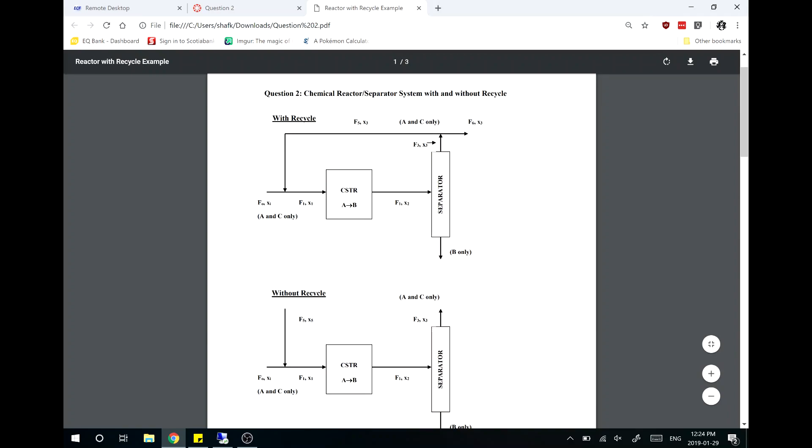Assumption 4: no transportation delay between separator and feed recycle mixing point. How about someone from the table over there, you guys? Yeah, someone from that table. I should have numbers, like table number 3. Yeah, you guys over there. Hello? Yeah, you guys, you're going to answer this question for me. How do we make use of the assumption that there's no transportation delay between separator and feed recycle mixing point? How about you guys help them out? Right here, yeah. No transportation delay between separator and feed recycle mixing point. Anybody there?

Well, I think that X3 would be the same, so you can use that especially in the mixing point calculation, or in Formula 1. Yep, so there wouldn't be any time delay. Right. And you can assume that they'll be the same. That's right, exactly. So the fact that we use X3A as the mole fraction leaving the top of the separator, and you notice in the mixing equations we use the exact same X3A as the mole fraction going into the mixing point—from a steady state point of view, that looks totally reasonable.

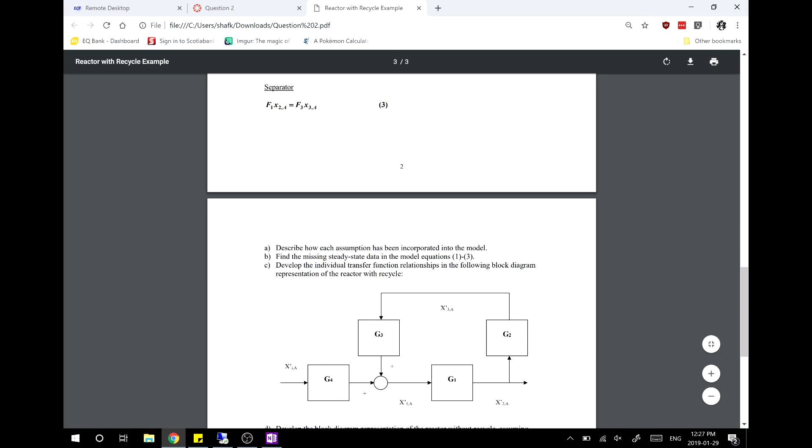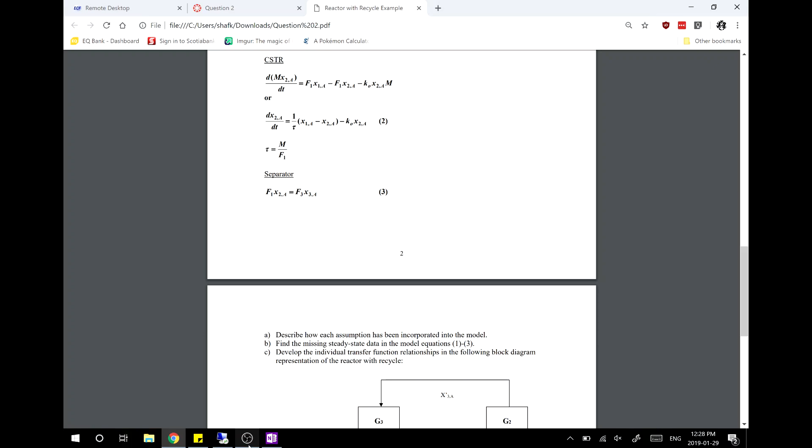Okay, so the next part is a little bit of pencil and paper work. What I want you to do is question B: find the missing steady state data in the model equations. I give you some of the steady state data but not all of it. The main things we're after are X1A, X2A, and X3A at steady state. You're only given XiA at steady state, what's going into the entire system at steady state, 0.95. But I'd like you to solve for the other 3 mole fractions, X1A, X2A, X3A. I'll come back and ask that table for some information, and you guys at the back corner give me a piece, and you guys right in front give me a piece too. So we're saying find the missing steady state data in the model equations.

Alright, I'm gonna mute the video for a second because I don't want people to hear the dumb shit I'm gonna say.

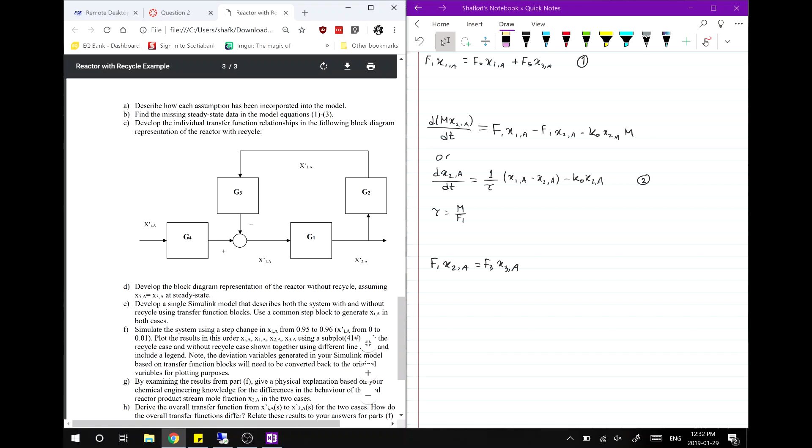Still setting up the equations, okay? You guys over there have a number for me? You got one for me? At the back wall, still working? Here, still working? Okay, give you a few more minutes.

So you should be working with all algebraic equations. The only time derivative is the CSTR, so you set that to 0, and then all other variables get set to their steady state values. Oh, that's right, so you have 1, 2, 3, 4 equations. The CSTR is not changing with time, so that is 1 true equation, and four unknowns: flow rate and 3 mole fractions.

Okay, you can attempt this, does someone have their hand up? Do you have one for me? But I'll still wait for him to do it anyway, just to confirm the answer. I'm not confident. Why aren't you doing this? Why aren't you doing this? Doing what? No, like writing it out. Oh, because it's simple. Yep.

Yeah, I'm trying to do question 2C, sorry. I'm not exactly the best with transfer functions. Yeah, neither am I. So at this point I don't even know how to do this stuff. Probably gonna wait for him to do it.

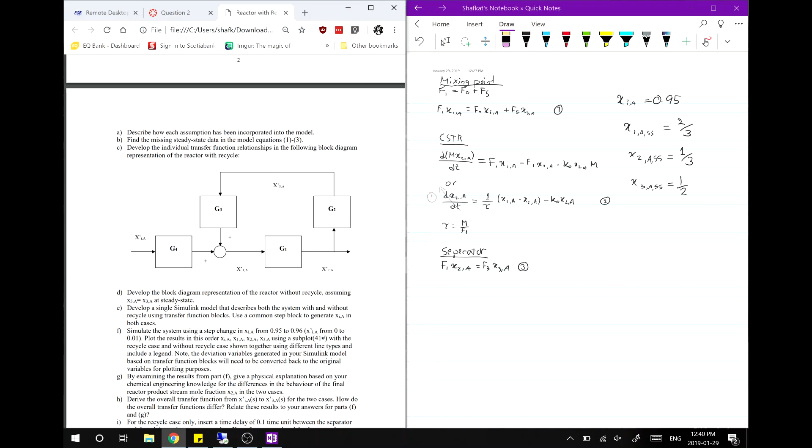Okay, so it's just output over input is all it is. So every transfer function is always output over input, right? Yeah. And if we start with G1, like he said, the output is X2A, while the input is X1A. Isn't that right?

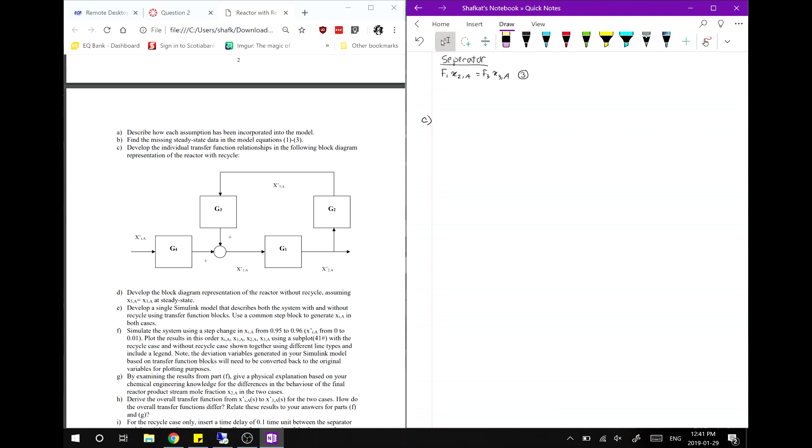And then do we write X2A out, like in the equations that are given? So the output is gonna be x prime 1 of A, and the input is x I of A and x3 of A. It's not X prime 1 of A? No, this is to get this, you're inputting this and this together. Yeah, I get that, but I thought we were starting with this one. Oh, if you start at that one, then it's x2 prime.

Yeah, that's what I was talking about. Okay, let's start with G1. I feel like that just makes sense. Okay, because he also said it in that order. Okay.

So the transfer function is output over input, and that equals x prime of 2a over x prime of 1a, right?

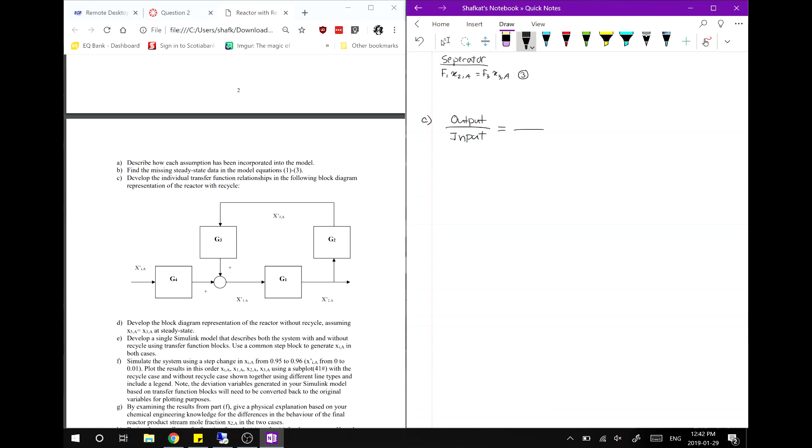Well, you gotta write down the equation. We have to write these out in the form of the CSTR equations given? Yeah, so you usually get y prime over u prime of s. But then I don't know what equations to use for those. Oh, we would need the Marlin textbook, right? For the Laplace transforms? Yeah.

Oh, right, then it's y prime of s over u prime of s. Or I think it's the other way. You could open up the Marlin textbook, like I can on my computer, but I don't know what to look for and where. I need to recruit someone who's smarter at this stuff to help me record the videos. Oh, sorry, Shafkat. No, that's not how I meant it. Yeah, it is y prime of s.

Okay, but then I guess what we can do for the next part is, since we're still working at steady state right now, yeah. Then I guess you take the equations where you isolate for the two variables and put them on top of each other. So how do we change it to the S domain?

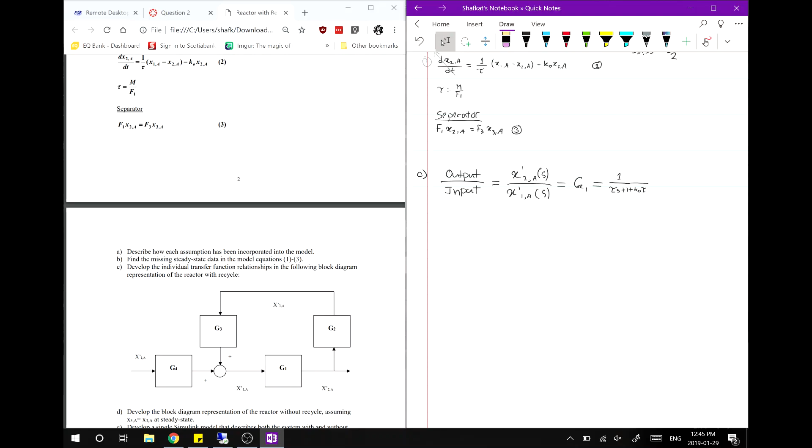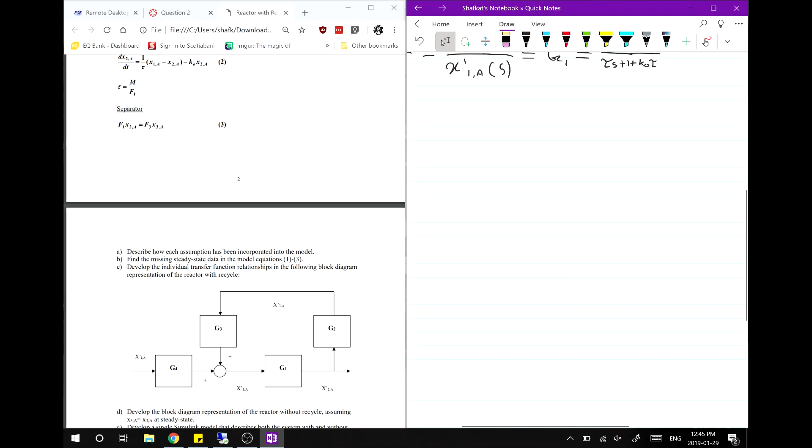1 plus K naught tau, right? So the numerator will become 1 over 1 plus K naught tau, over tau over 1 plus K naught tau S plus 1. Okay?

So the gain of this transfer function is 1 over 1 plus K naught tau. The time constant associated with this system is tau over 1 plus K naught tau. So notice that the time constant is not equal to the residence time, okay? Because the speed of the system, the response time of the system, is also related to the rate constant because we're tracking component A here. So the rate constant figures into the dynamics as well, which, in a way, you should expect.

Okay, now G2, you're dealing with just an algebraic expression here, so there's no derivative to get you into trouble. I'll just quickly do this one with you. Some of you may have already derived this, so we still write the equation at steady state. The methodology is the same. So the steady state equation is F1 x2a steady state equals F3 x3a steady state.

And then, as with the G1 case, you do a subtraction between the dynamic version and the steady state version. So it's really important you understand that first equation is a dynamic equation. I know there's no time derivative there, but remember I said we assume the dynamics were infinitely fast. It is still a dynamic equation. In other words, x2a is a function of time, x3a is a function of time. So it is algebraic, but that doesn't mean it's the steady state equation.

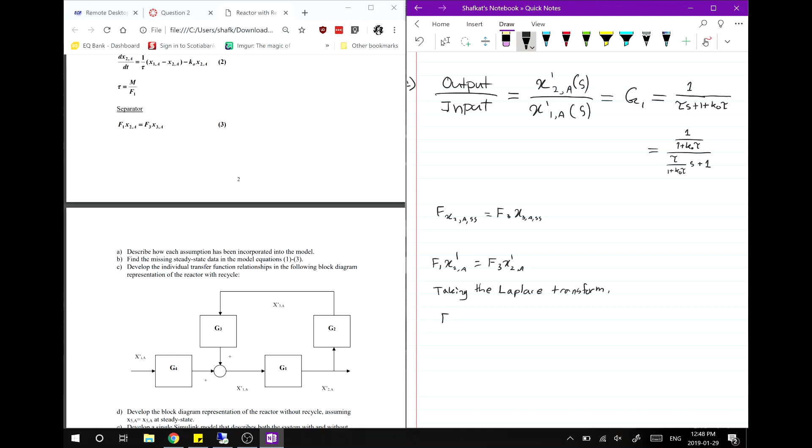And the transfer function that we're after here, the output, is x3a prime of s over x2a prime of s, is equal to F1 over F3. So what kind of transfer function is that? Think of our library of dynamic behaviors.

First order? No. Second order? No. Gain only. It's only a gain. And this is how this very simplified model of the separator behaves.

If x2a changes, say by a step, then x3a also changes right away by a step, scaled by f1 over f3. So real separators obviously don't behave like that, but it...

keeps things a little simple for today's tutorial. So based on that, go ahead and just get G3 and G4. The difference here with G3 and G4 is that you have really, looking at the subsystem, you kind of have two inputs, one output. So what you're looking for is an equation like this: X1a prime of S is equal to some transfer function G3 times x3a prime of S plus G4 times xia prime of S.

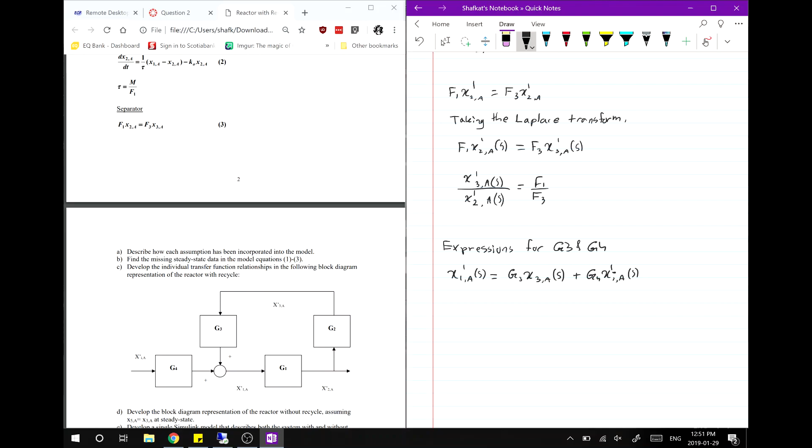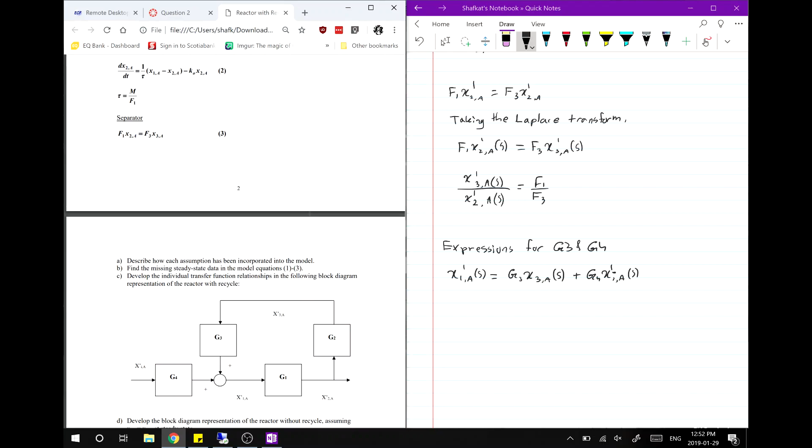So, okay, we can write x3 prime of A, and xi prime of A out, right? You're adding... this is what you said in the beginning, yeah. This is exactly what you said in the beginning. If we were to start with the mixing over here. Yeah, you just add them together. So it's G3 x3 of A plus G4 xi of A. That is equal to x1.

S. So then if you were to, I guess you would want to, that's hard. G4 and G3, so they're different. And you probably can't just take out, you can't take out G4 and G3 by themselves. So, we want to find G3 and G4, so then we would have to find them independently first, right? Like, we have to find one of them on its own, then use it to find the second one.

Awesome. So would we be able to find, let's say, wait, can we not solve for G2 first? And then using G2, we can solve for G3?

Yeah, we could. The approach for the mixing point—just because I want to move along, it's really important you guys make sure you know how to do this. But I want to get to the simulation work, so this is sort of the preliminaries. So again, we're dealing with the mixing point as an algebraic equation. There's no derivative there.

Okay, we really are going to proceed very much like the way we did with the separator. We just write the steady state form of the equation: F1 x1a steady state equals F0 xia steady state plus F5 x3a steady state.

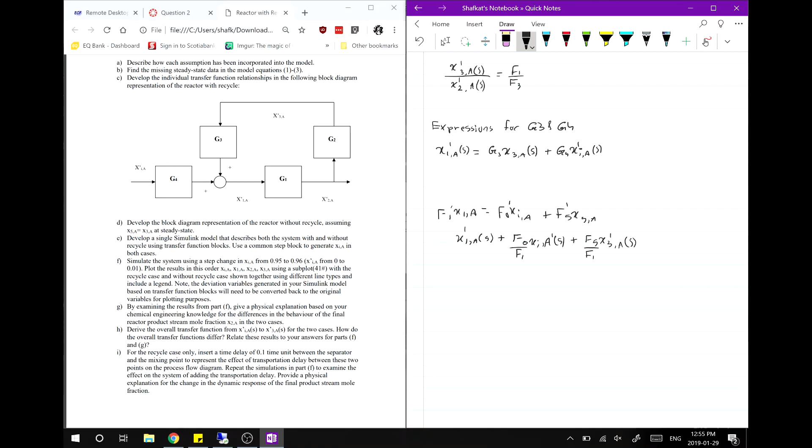Okay, so open Simulink, open up a blank model. If you have any questions, I'll just move through at a steady pace. Put your hand up and Mitchell will get around to you. Open up the library.

Start with the continuous library. Let's put a transfer function block onto our page.

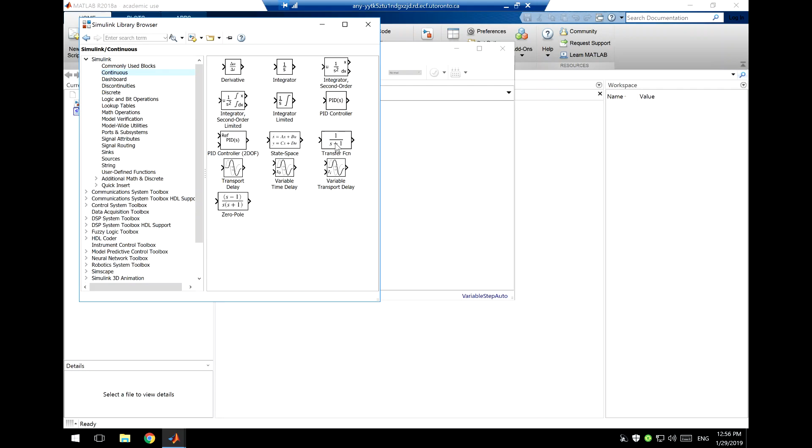What we'll do is build the block diagram first, then go back and fill in the parameters or constants associated with each, then do the numerical methods, and then do the simulations.

So this is obviously what we're going to use for G1. The other three transfer functions are gain only. Now I know we said in class that a gain only is like a special case of first order where you let tau, the time constant, go to 0. So in theory, we could simulate using a transfer function block with a 0 time constant, but numerically or computationally that's not a good thing to do. You can get errors.

So what we're going to do instead is use what's called a gain block. If you go to commonly used blocks, you'll find this triangle called gain. So we want one of those.

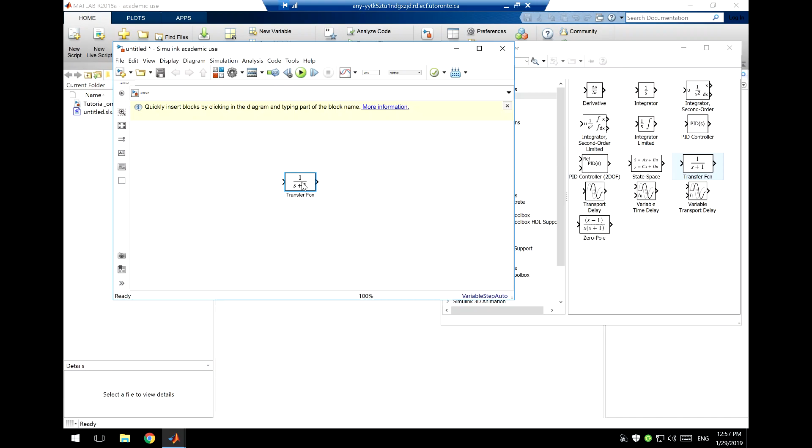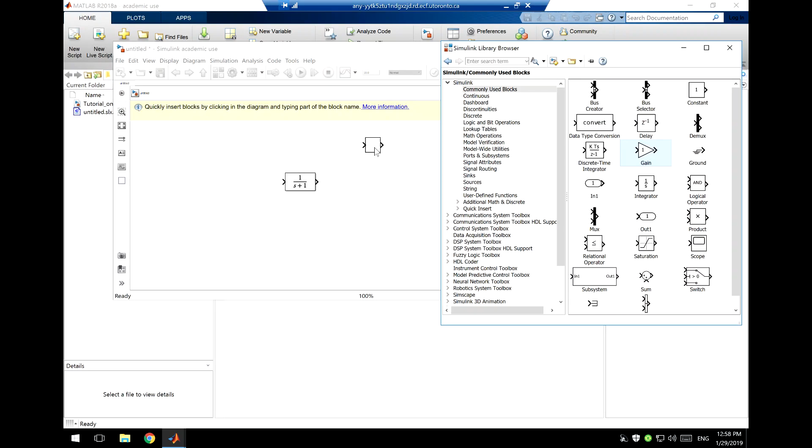And you might want to build the block diagram so it kind of looks like, for instance, the standard way the block is shown is inputs come in on the left and go out on the right. But in this case, we might like to orient this kind of like the process flow diagram. So you can right click, rotate and flip, and I'm going to rotate it counterclockwise once.

So that'll be our separator. Then we want 2 more of these. And you may want to, again, this one I want to rotate back clockwise. And this one I want to maybe flip it.

And we need one summing junction, so in the same commonly used block library, we can grab a summing block, bring that onto the page. And then we can start making the connections.

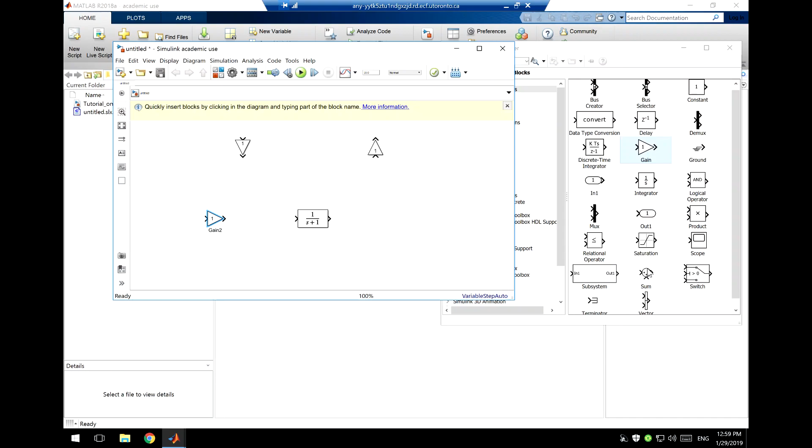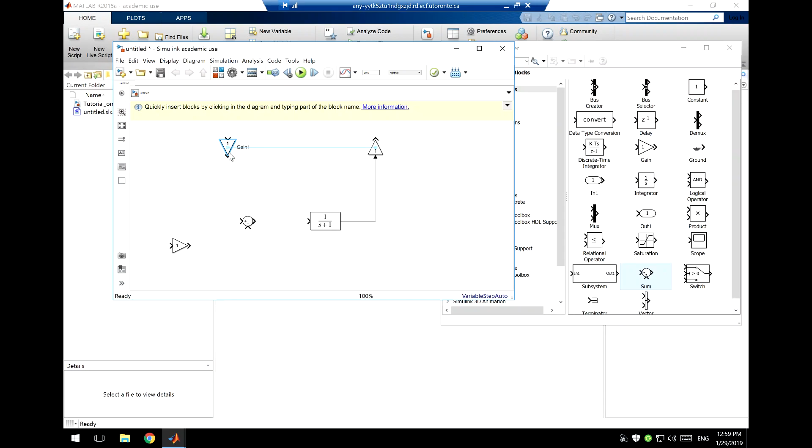So G1, the output of G1 is the input of G2. The output of G2 is the input to G3. And then these come together for the mixing point here. Okay, so something like this.

Now the only true input variable, when you look at the entire system, the only true independent variable is XIA. X1A, X2A, and X3A really are all dependent variables. When you step back and look at the entire system, I know when we were looking at subsystems we were thinking of X2A as kind of an input to the separator, X3A as the output of the separator. When we looked at the mixing point, we said X3 was like an input to the mixer. But when you step back and look at the problem as a whole, the only independent variable is XIA, and everything else flows from that, or is governed by that and the equations.

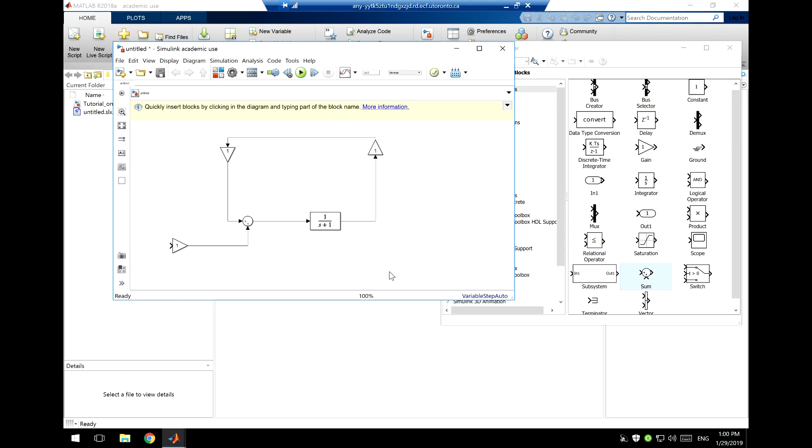So we only need one source block, which will drive the simulation. So go to your source library, and let's put a step block there. And connect those up.

So now let's go in and put in the parameters of the 4 transfer functions. So I just need your help because we need the numbers here.

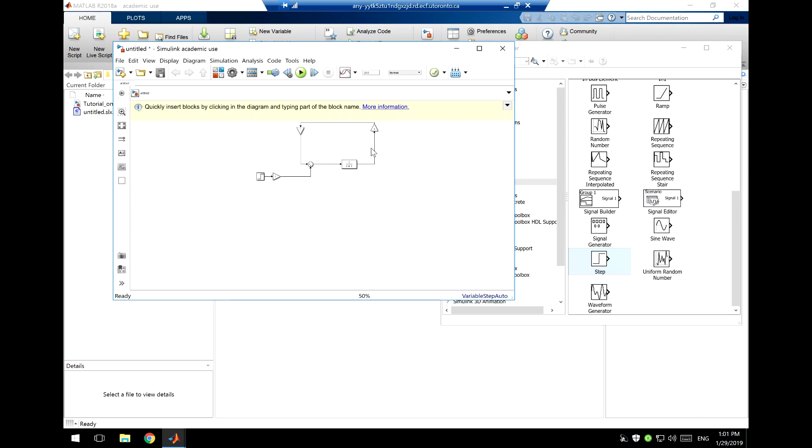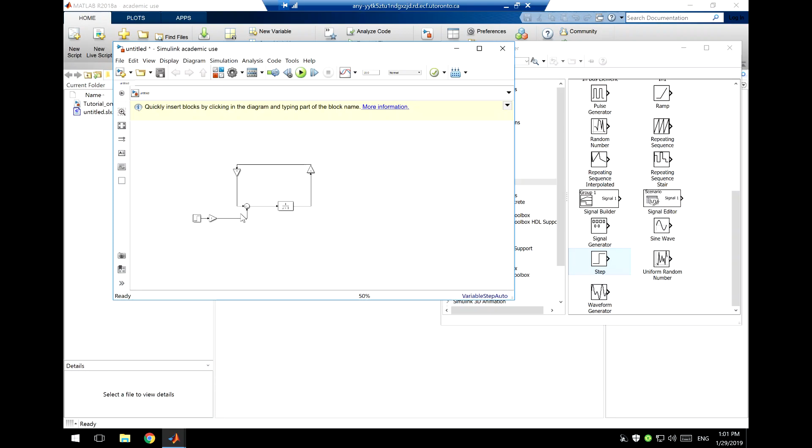So what we need is an expression for 1 over 1 plus k naught tau. We need numbers here. So that's 1 over 1 plus 1. Right? Is it 1/2? 1/2, everybody okay with that? So I'm going to just put in 1/2, and sometimes it's helpful to put it in this way. Then actually when you come back and look at it, we could put 0.5, but the fact that it's 1 over 2 may remind you that it was 1 over 1 plus k naught tau that determined that.

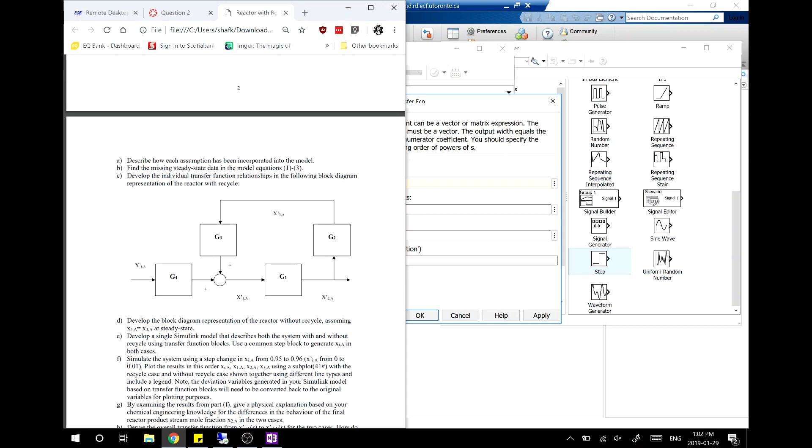Your denominator, so we now need tau over 1 plus k naught tau. So tau is, what is that value? Someone want to help me? 5/27. What is it? 5 over 27? Or 0.5 over 2.7? Or 1 over 5.4? Right? Those are all the same number. Is that correct? Am I doing it right? So 1 over 5.4 is what I'm going to put in. But if you're wondering where that comes from, this is tau over 1 plus k naught tau, and I'm just plugging in the values for k naught and tau that we've been given. Okay, that's okay.

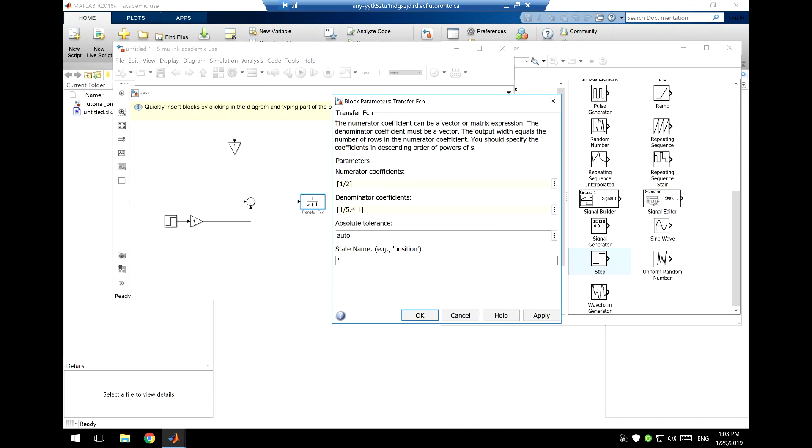Now, we can always make the block a little bigger if you want, so that it shows the parameters. So let's do G2 next. So what did we say G2 was?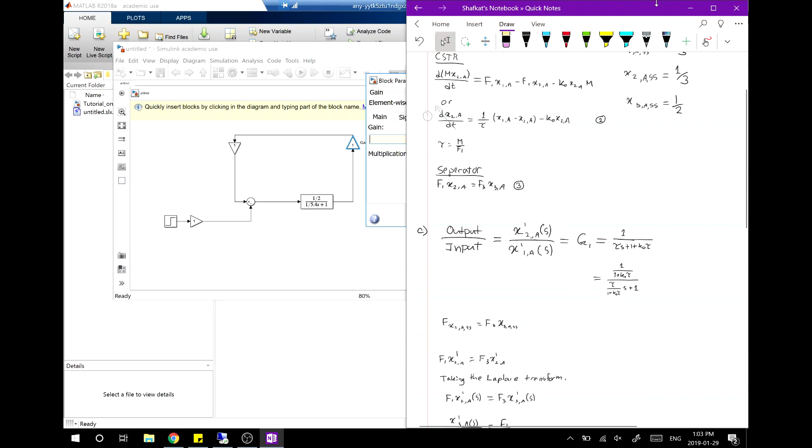F1 over F3. So F1 is 2.7, over 1.8, is that right? 2.7 over 1.8, so again, I would probably put it in like that. You could do the division, but then you'd forget where the heck this number came from. It's more likely you're going to remember it if you see 2.7 over 1.8. Let MATLAB do the division for you.

Next, G3. Again, I can make this a little bigger so it shows me. So now G3 was F5 over F1, is that right? So that's 1.7 over 2.7. Is that right? 1.7 over 2.7, thank you. So 1.7 divided by 2.7.

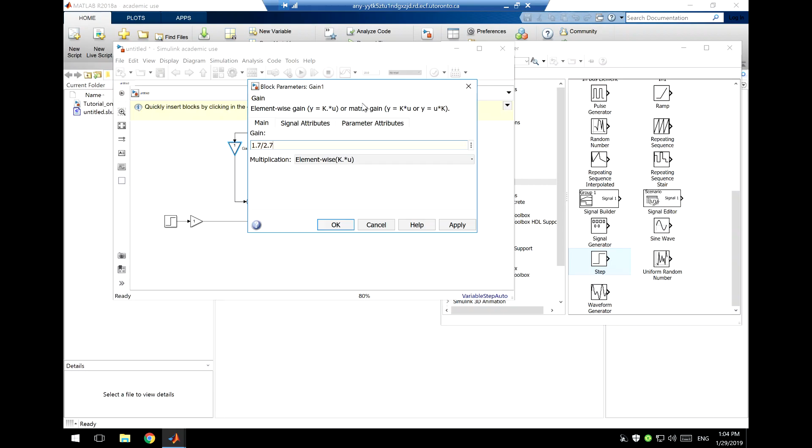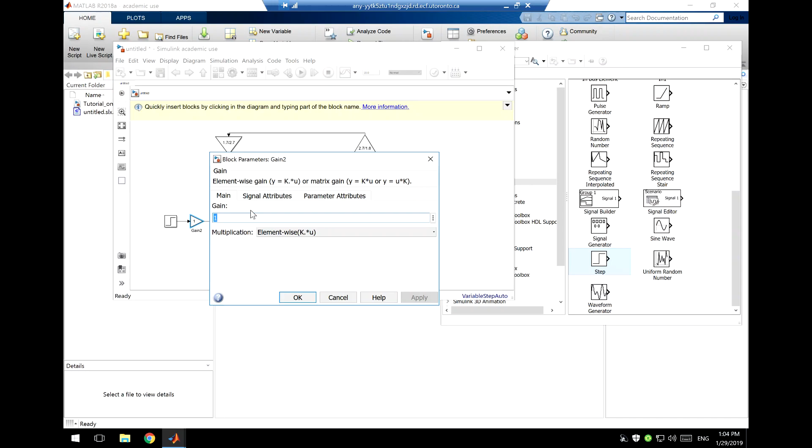And last but not least, G4, which is F naught over F1. So that's 1 over 2.7.

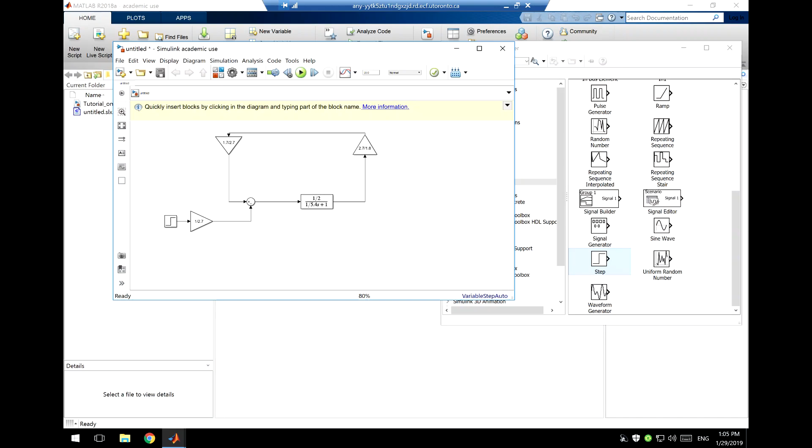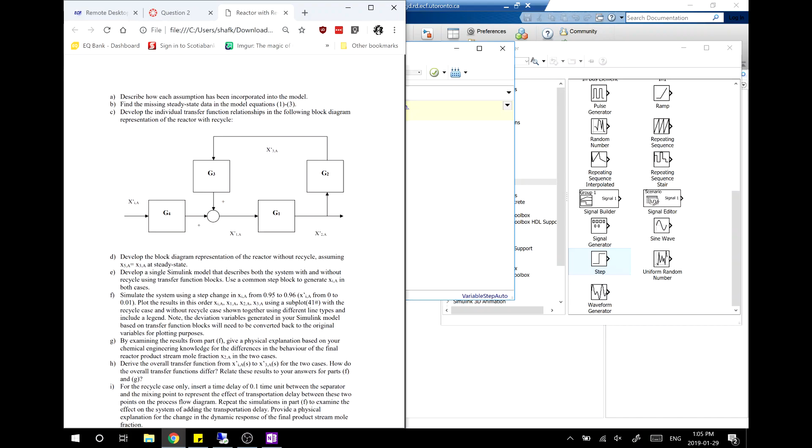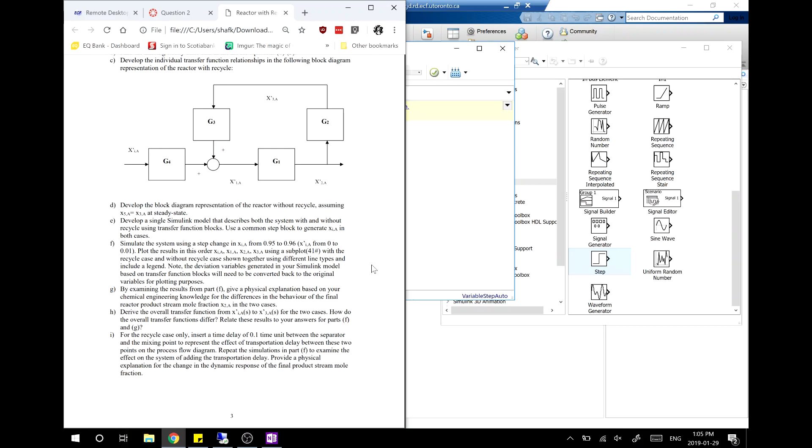Okay, so all transfer functions are in. Now, if you read down the assignment a little bit, you'll see that we're eventually going to want to do a dynamic simulation introducing a step change in X1A from 0.95 to 0.96. Now remember, whenever you're dealing with transfer functions, we're always in terms of deviation variables. So in this simulation, because we've used transfer function representation, we have to put the change in X1A in its deviation form. So in deviation form, the initial value is 0 and the final value is 0.01. That corresponds to a change in X1A from 0.95 to 0.96 after you subtract the 0.95 steady state. We can leave the step time as 1. That's a somewhat arbitrary thing, but the simulation here is.

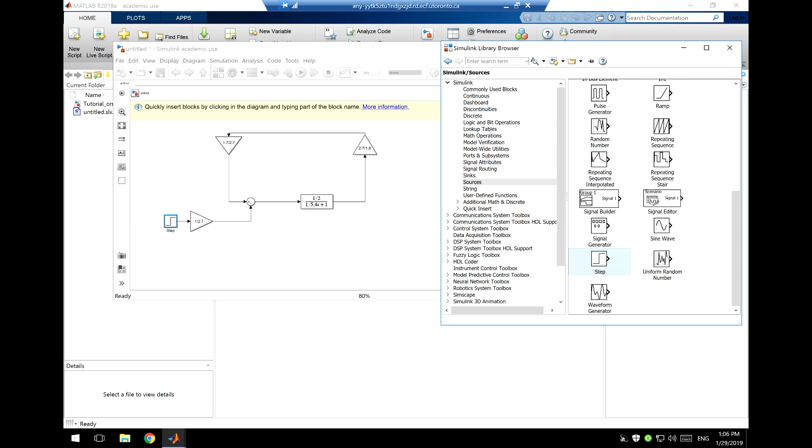So that's in. Let's go, we want to eventually plot all 4 mole fractions that would be possibly measurable. So if you go to your sinks library, we're going to use workspaces.

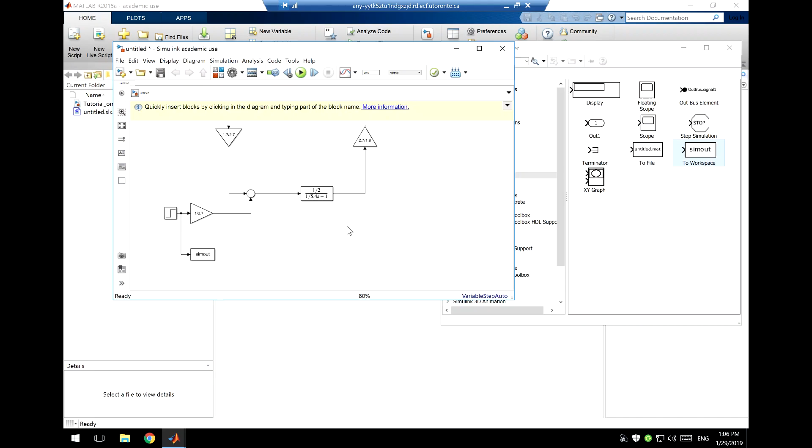So we're going to capture XAI. We also want to capture X1A. We want to capture X2A. And we want to capture X3. Okay, so again, I encourage you to change the names so they're sort of meaningful.

So I'm going to call this capital XAI. It's a deviation variable, so if you want, you can call it prime. And remember to change the save format on these to arrays.

Now, before we go any further, the assignment actually asks you to plot not the deviation variables, but the original variables. So what I've got here going into the first workspace is actually the deviation variable, not the original variable. So what do I have to do to the deviation variable to turn it back into its original variable form? So if I have the deviation variable, what do I do? I add the steady state value.

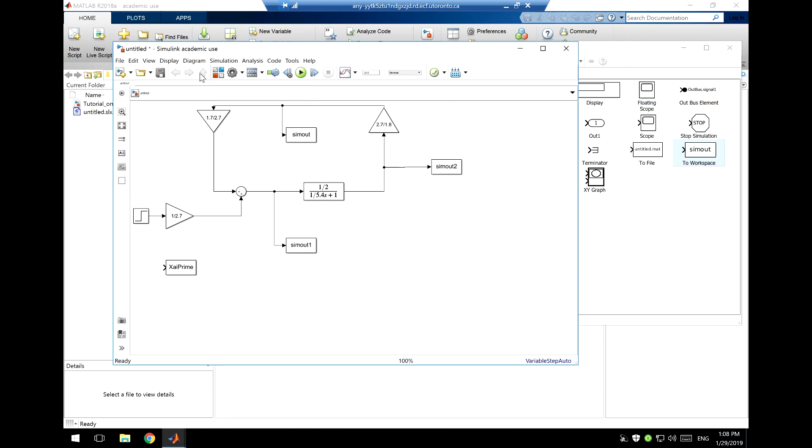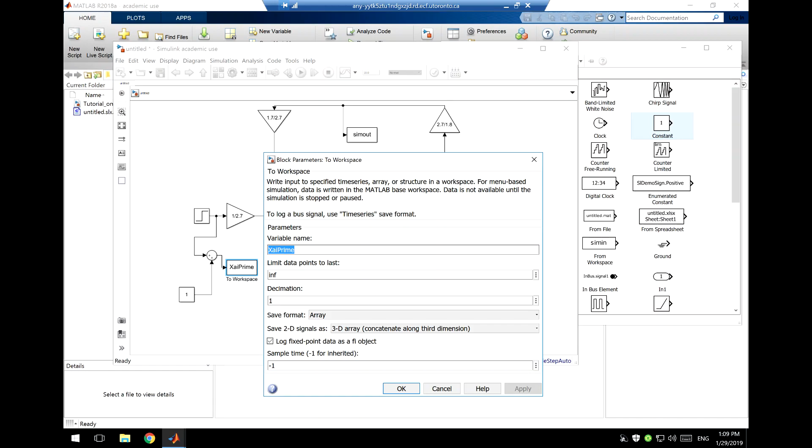So I'm going to correct my mistake here, and I'm going to put a summing junction here. And from the source library, I'm going to get a constant block. So we're going to combine the constant and the deviation to produce the original variable XAI. So I can actually rename this XAI now because that's what I'm going to save as the original variable XAI. So this is XAI prime, and I want to add to that XAI steady state. And the steady state value is 0.95.

Okay, so configure all the workspaces in the same way. It's a constant. This is one of the reasons, for instance, that we started out by calculating the steady state value for X1A, X2A, X3A, because we're going to use them right now.

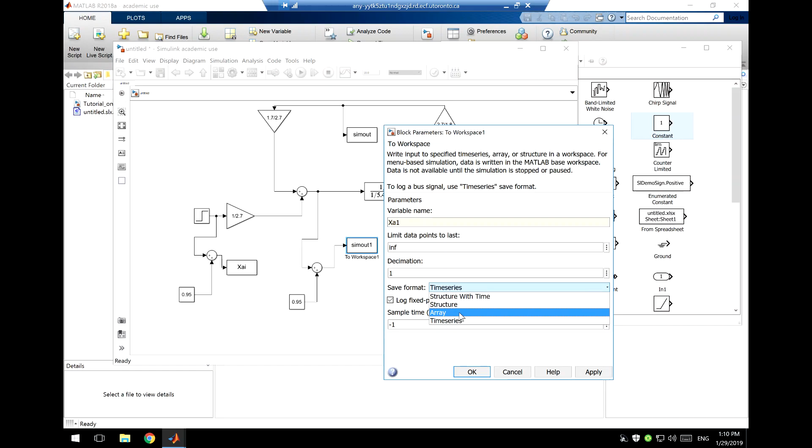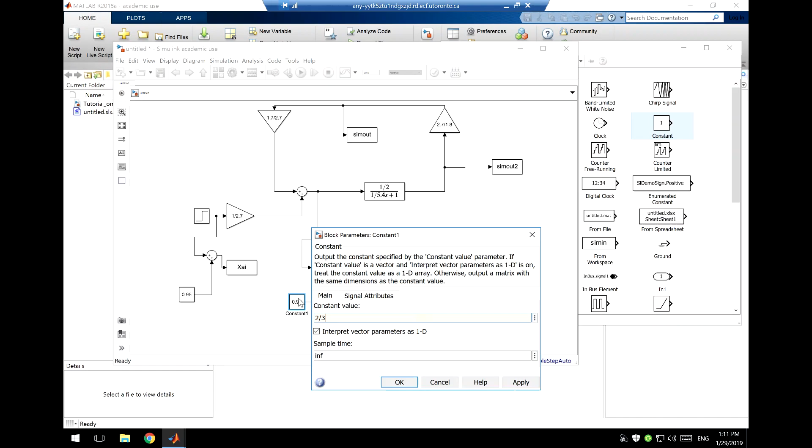So this one I'm going to call XA1. Switch save format to array. And then we need to put in the steady state value for XA1 here. And what did we say that was again? 2/3. Thank you. 2/3. What is that? XAI. Just keep going. Do the same here.

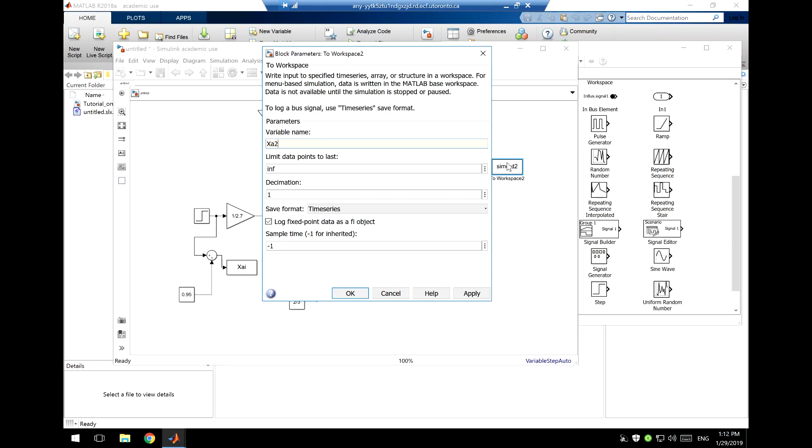This is XA2. Save format, switch to array. And then we need to put in the steady state value for X2A. And this is 1/3, I think. Yeah.

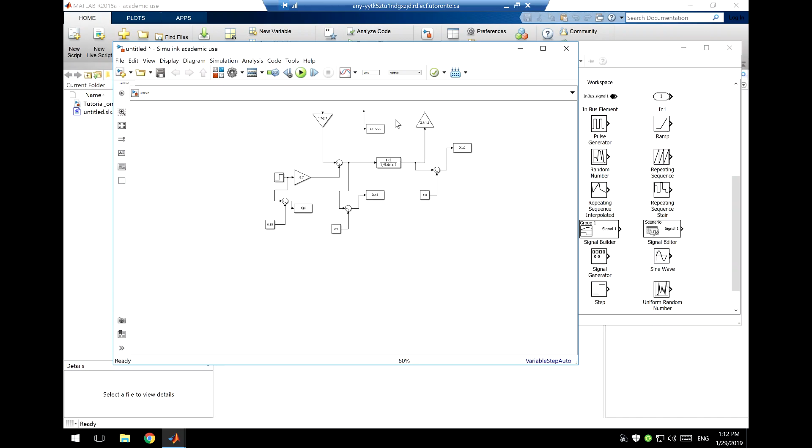And we have one more to do up here. This is XA3. And then XA3 steady state, 1/2. Okay.

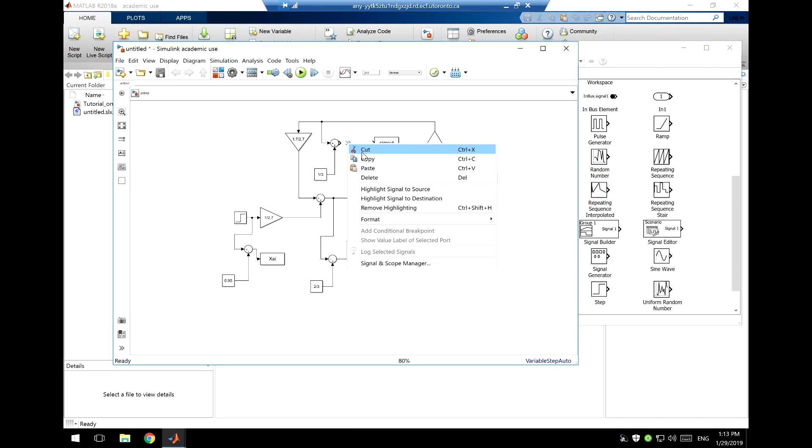So that's the simulation. We've got our workspaces. So the last step is the numerical methods, before we do a run. So we go to the gear, bring up configuration parameters. So the units in this problem aren't given. I mean, I just say that the units of time are simply time, so the default simulation is from 0 to 10 time units, whatever the time unit might be. And we're introducing the step change at time 1.

So if we were to try to guess how long this system would take to reach steady state, what might we do? Well, the only transfer function in the entire system that has any dynamics is the reactor. So a reasonable thing might be to look at the time constant of the reactor, because the separator and the mixing point don't have any dynamics - they're just algebraic equations leading to gain-only transfer functions.

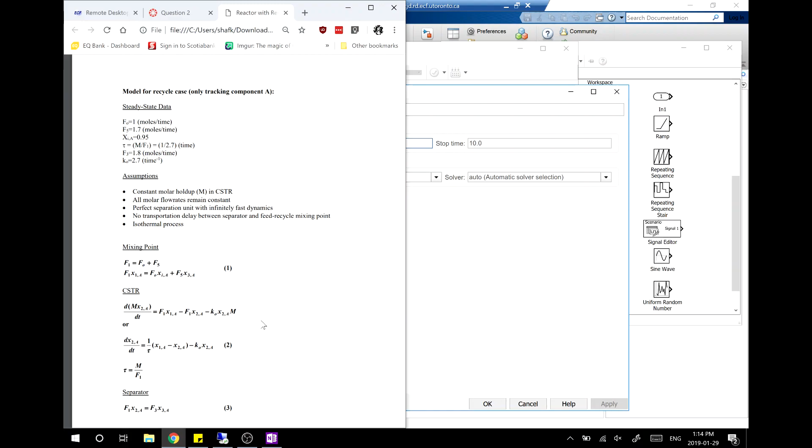What's the time constant of the reactor? What's the numerical value? We said it was 1 over 5.4, which is, call it 1 over 5, about 0.2. 4 tau, about 0.8, around 1. So a reasonable ballpark estimate of how long the system might take to reach steady state after we introduce the change might be about 1 time unit, just ballpark.

So probably simulating from 0 to 10 is a bit more than we need. So let's go 0 to 5. And we always use fixed step. ODE4 is our go-to solver.

And I would never want you to use the auto solver - it's not a very good algorithm. In fact, I'd always want you to choose this with some justification. So again, my rule of thumb is look for there's only one time constant. We said that time constant was about 0.2. So I said you would not want to choose a value any bigger than 1/10 of that, which would be 0.02. I'm going to err on the side of accuracy over speed, so let's go 0.01.

And now we're ready to run, so you can run that.

And let's take a look at the workspace. You should have a workspace similar to mine here. You have the 4 mole fractions, and T out, which automatically gets captured, is time. And why are they 501 by 1 vectors? We're simulating for 5 time units with a step size of 0.01, so that's 500 plus the 0 point is 501.

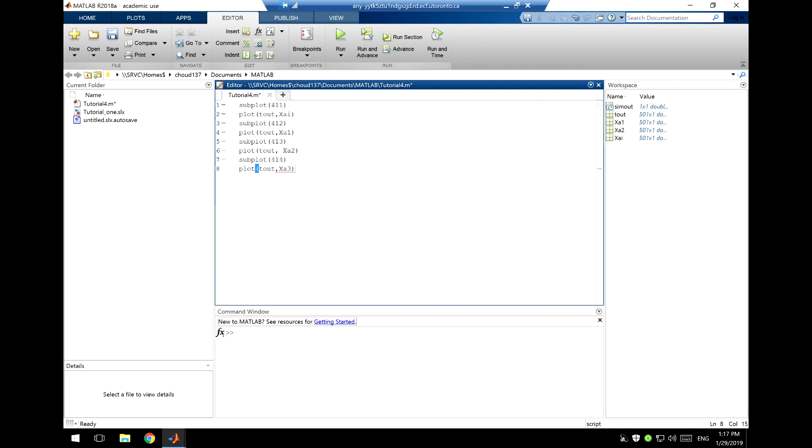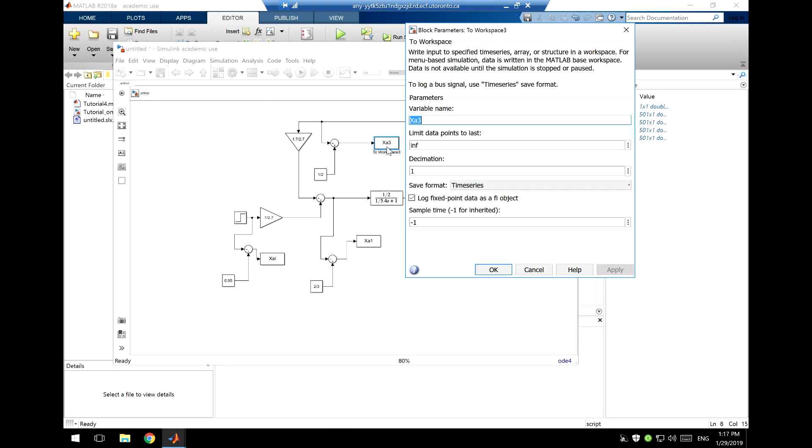Just wait a minute till everybody gets this plot, because I want to walk through this and make sure we understand what's happening. Give everybody a minute to get that figure.

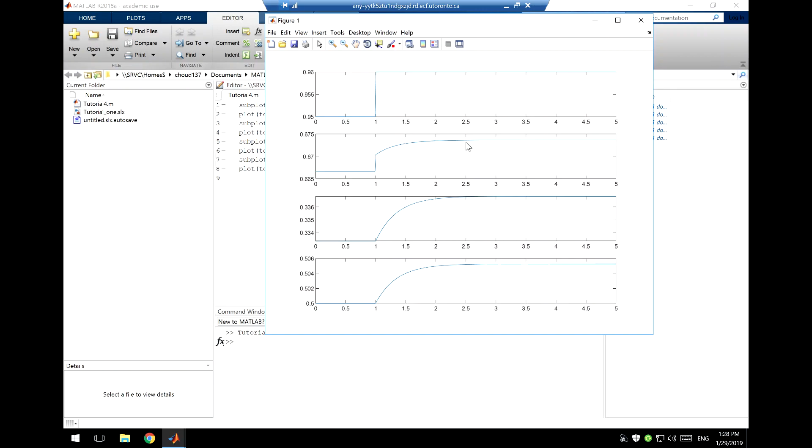And then just try to paste it down below here, see if that works. And you can actually run simulations, like you can have two models running basically at the same time.

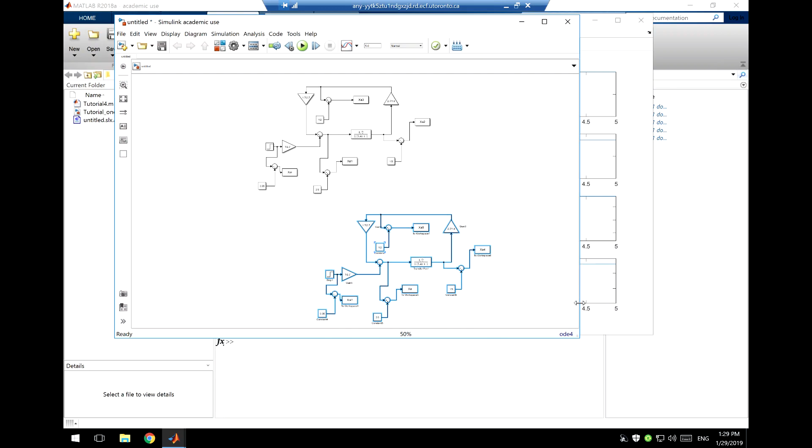But before we run the simulation, we need to rename the workspaces, because I don't want to overwrite the with-recycle case. So first what we're going to do is do the modification required to do the no-recycle case.

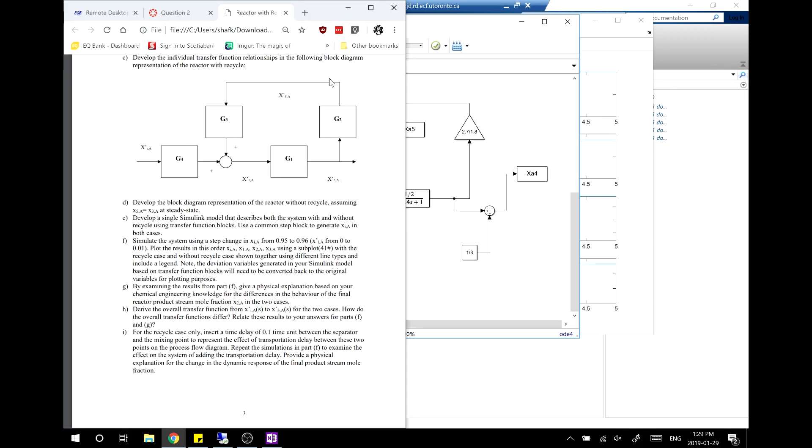If you look at the process flow diagram, basically what we're doing in the no-recycle case is we're not taking any of that A coming off the top of the separator, and we're not going to return any of it to the mixing point. We're just going to send it all downstream. No fraction is going to be recovered; we're just going to send it all downstream.

In the block diagram, the way we can do that is just by disconnecting this. So I've now broken the recycle connection here. So we're coming off the top of the separator with X3A, but I'm not going to feed that back to the mixing point.

Now, to make the two systems, with recycle and without recycle, identical at steady state, I actually need to introduce a secondary feed stream, which has the same steady state flow and mole fraction as the recycle stream in the first simulation. So I'm going to introduce a step block here, because now I've got a new input variable, which is the mole fraction of this secondary feed stream, which I'll feed into my mixing point.

So what I'm referring to in this diagram is the fact that to make these two systems identical at steady state, I'm obviously not doing any recycle. You can see clearly here the stream -- none of that stream is going back to the mixing point. But to make the two systems equal at steady state, I'm introducing this new secondary feed stream called F5.

And F5 will be equal to the flow rate coming back here, F5. And the mole fraction X5 would be the steady state value -- the mole fraction X5 would be the steady state value of X3.

So it just means that what I'm doing is making sure that the two simulations have exactly the same steady state solution. So therefore, people can't say that if we see any differences between the two, it's due to the fact that we don't have the same feed flow rate, which would be a valid criticism of the comparison. So the comparison I'm doing allows us to say the systems have exactly the same steady state solution, and so any effect we see here can be attributed to dynamics.

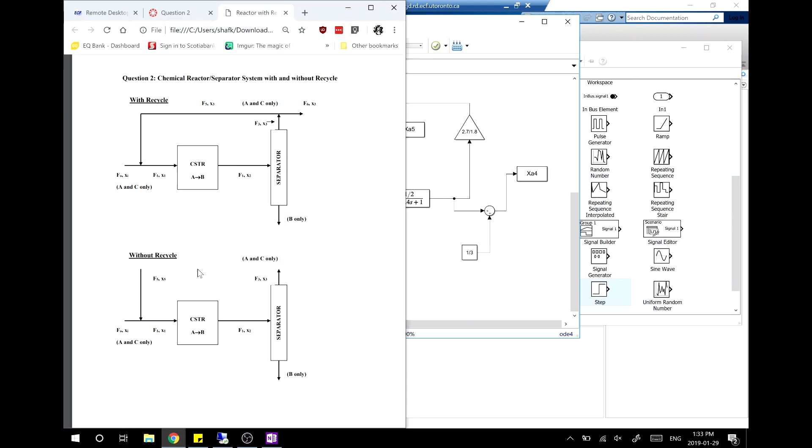Okay, so going back to the Simulink program. What that means is I'm cutting this off, and I'm connecting up this stream. But this mole fraction, when we do the simulation, the secondary feed mole fraction will not change. So this will be 0 in, 0 out.

So in effect, nothing is changing with respect to that secondary feed stream, whereas in the recycle case it does change. You could just put a constant there equal to 0, which would do exactly the same thing, because this is a deviation variable -- the simulation is in deviation variables.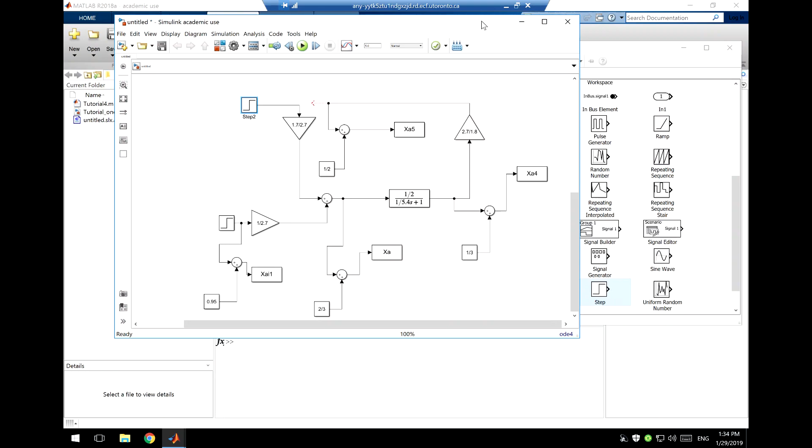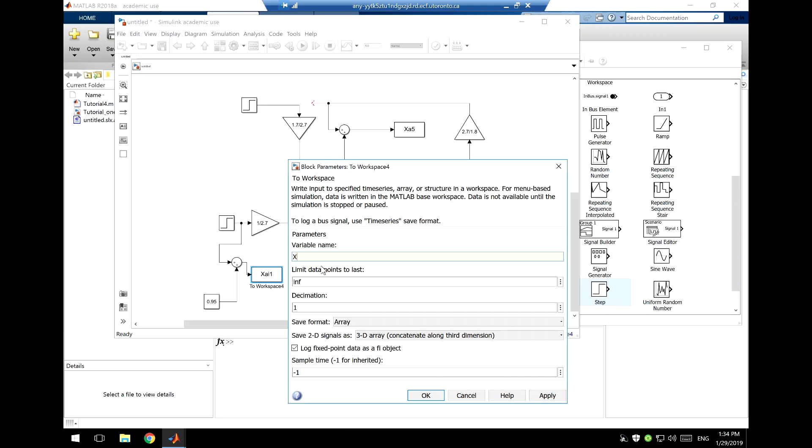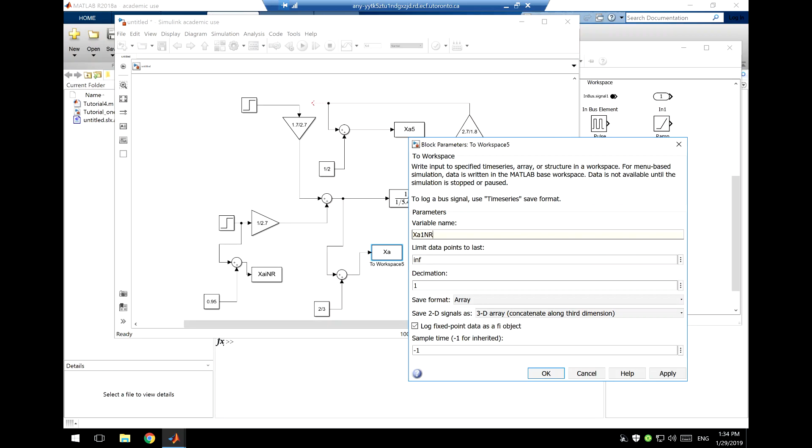Now, what we have to do is make sure the workspaces are named appropriately but differently. So XAI, it's out of the 1, right? So what I'm going to do is change this to XAI NR for no recycle. And then this one, which previously was XA1, I'm going to change to XA1 no recycle. Now this one over here was XA2, so I'll change this one to XA2 no recycle. This is just so it doesn't overwrite or create conflicts.

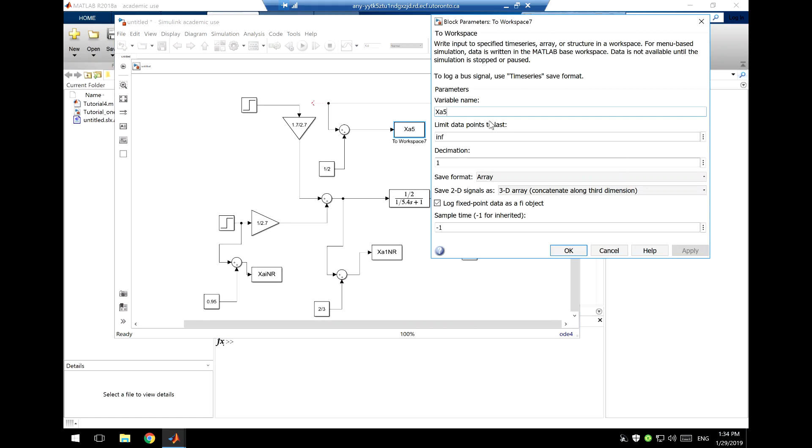No recycle. Now we could put a workspace block on this variable, XA5, actually it's XA5 prime, but I'm not changing that variable. If we captured it, we'd just add its steady state, and it would remain there. So I'm not going to capture it since it's not changing. The only thing changing is XAI.

So we can run the simulation now. Should work. I might get an error message for my unconnected block. No, didn't mind. So in my workspace, I should now have XAI, XAI-NR, and 1, 2, 3, 4.

If you created a script, I'm going to edit it to include, in the same figure, the no recycle case. So I need a hold here, and then I can do plot T-out, XAI no recycle. Now hold is a local command, not a global one, so you need to put hold into every subplot.

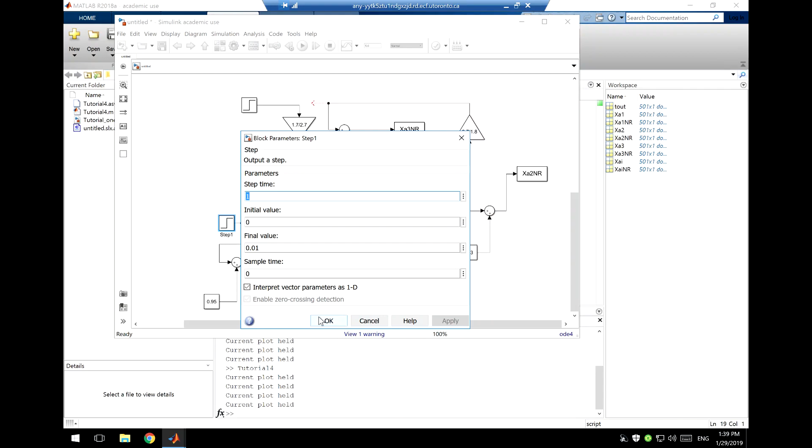Oh, I think I know why. Over here, did you change anything? No, to the step, it's just here though. That should still be, just open that to make sure. Yeah, no, that's what we want. Oh, the only thing I didn't catch is when you disconnected the recycle stream and added this step change, final value 0.01, okay there we go. So it's a secondary feed stream to make sure the steady state of the two systems is the same. But the disturbance we're going to introduce is identical, so it's all good, XAI, understood, thank you.

Everybody okay with that? That's good. Yeah, why is my shit different? Okay, why? Okay, I don't know how to use Snapchat. I'm stupid. I'll take a picture of me, sorry. Sorry.

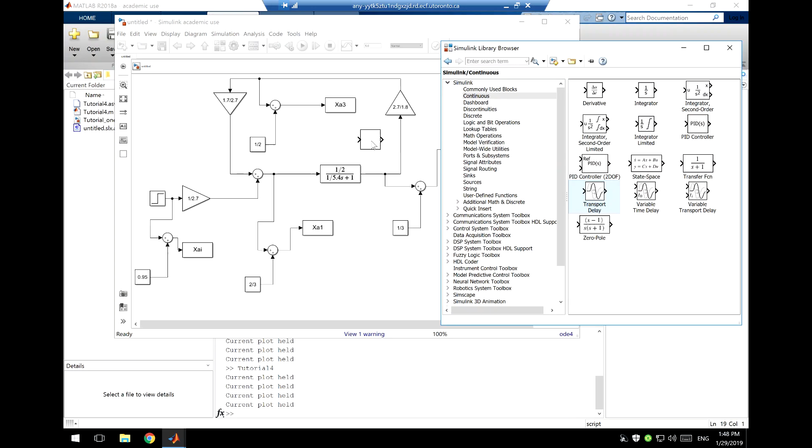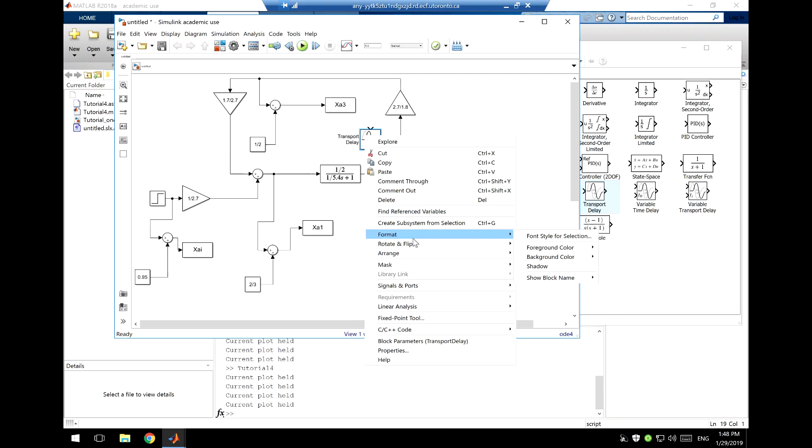Because of the orientation, I want to insert this between the separator and the mixer. Let's get this oriented properly, so I'm going to rotate it clockwise once, clockwise twice. That switches it to the orientation I want, because instead of disconnecting lines and reconnecting, you can actually splice this right in.

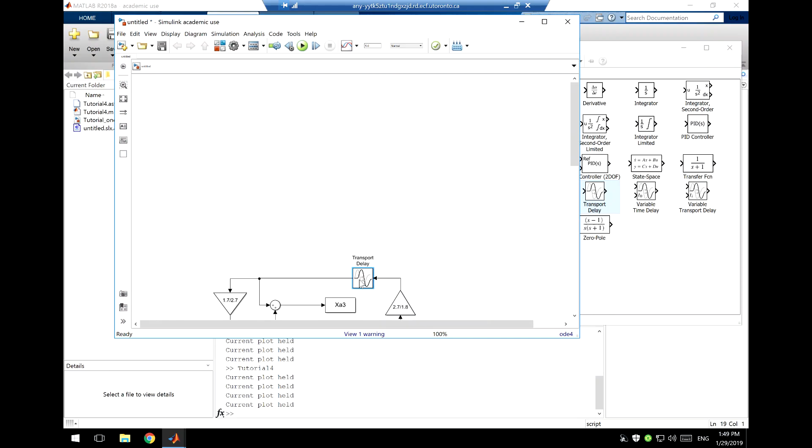If I take that block and hover it over right there and just drop it in... oh, I didn't get it. There, you can drop it right in and it'll splice it in, meaning it essentially automatically does the disconnect and reconnect for you.

So this is a transport delay block, exactly like what we talked about in class this week. This simulates the effect of the fact that it takes time for material to flow from the separator along a pipe to the mixing point.

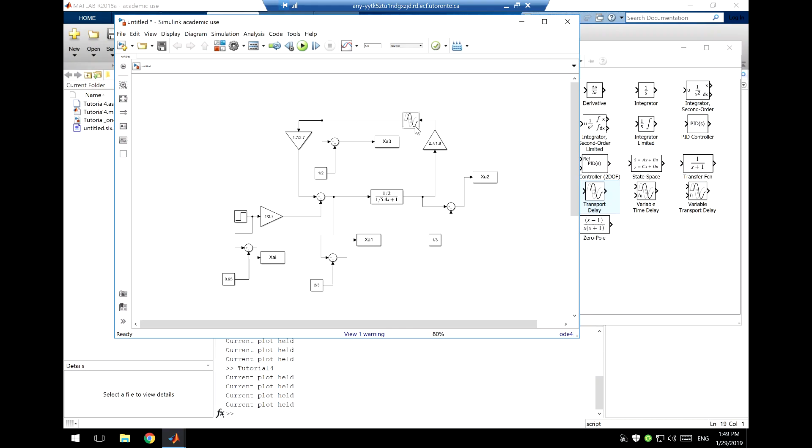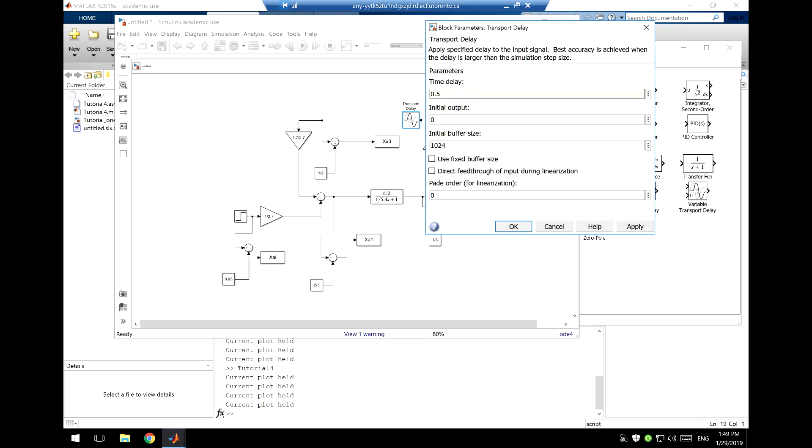Let's start by simulating a time delay of 0.5 time units. Just change the time delay here from default, let's change it to 0.5, and then run the simulation.

Let's look at that, and run your script. So this is the figure you should be getting. I'm just going to run it again, and I'll comment out the no recycle case just not to clutter the plot.

Okay, so this is the figure I'm after. See if you can get this figure here. Again, we're going to try to explain this as chemical engineers. I'll give you a few minutes to get that plot.

Okay, let's look at the results. XA1 changes by a step from 0.95 to 0.96 -- the mole fraction going into the reactor does that initial step change. It's less than 0.01 because of the dilution effect, and then it stays at that value. Why does it stay at that value?

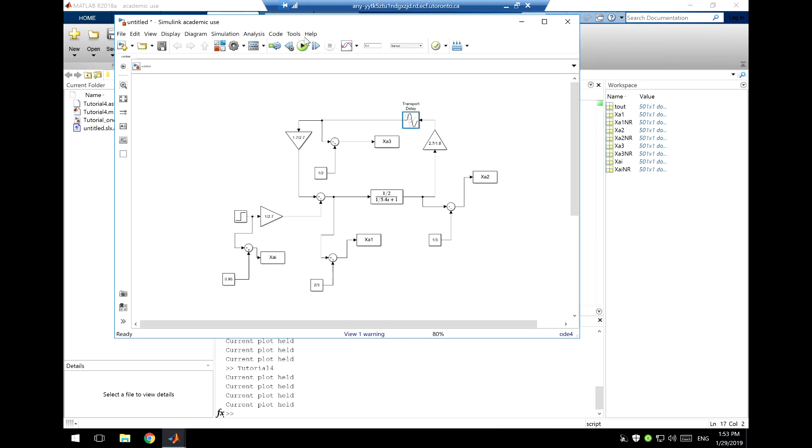Okay, and let's just for fun rerun it one more time with a time delay of 1. Just change your simulation, change this back to 1, run it, and plot it. Oh no.

It's even longer. You can see that this system takes even longer -- starting at 1, it looks to be settling around 5. You can clearly see this effect where XA2 goes up, goes up, goes up. If you're ever in any environment and you see that kind of behavior, it's a clue that there's recycle in the system -- an effect that just keeps wrapping around and around. Eventually the system does reach steady state, but it takes a lot longer.

Remember, the only dynamic elements here -- well, there's two: there's the CSTR, and we've added now the time delay. But the whole thing combined creates a system that's very slow and also very sensitive. So anyways, those are the main takeaways. That's it for today, and we'll hopefully see some of you tomorrow morning.